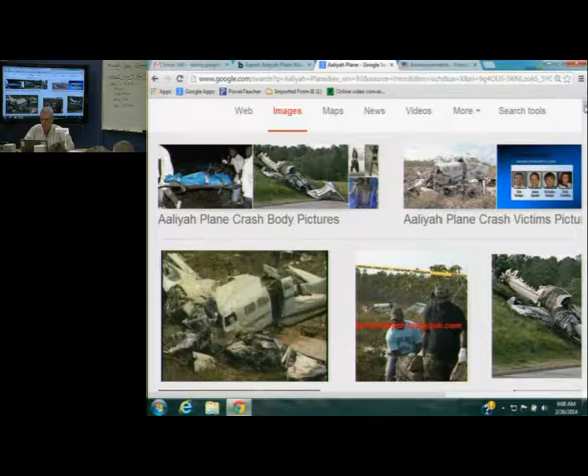Smoke inhalation, yes. So you can look at plane crashes and pretty much determine just by walking up to them the angle of impact of the plane. Write that down, angle of impact. You guys need to know what the angle of impact for the crash is. When you walk up as a safety investigator in the trees like this and you see tails, parts of the fuselage still there, you know that it did not go straight down and that it was probably trying to land or take off in this case.

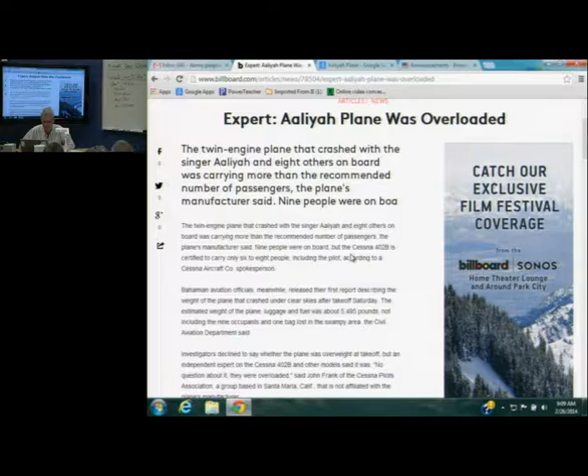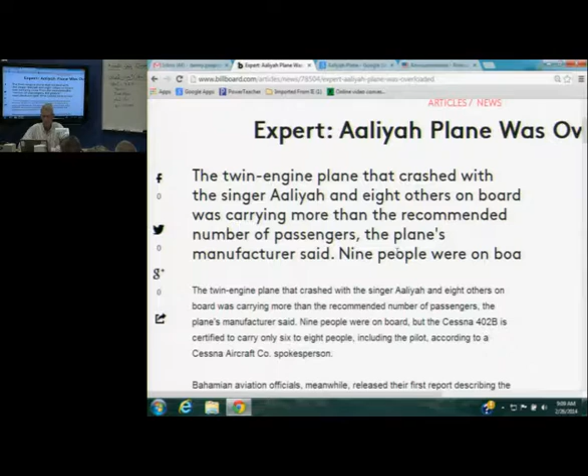So, to cut to the chase, this aircraft was a Cessna 402B, a big Cessna. It was designed to carry, I believe, 6 to 8 people. Can you all read that? Let me blow this up a little bigger. It was taking off from the Bahamas, 6 to 8 people, but 9 people on board. What would that tell you as an aircraft investigator? Overweight. Twin engine.

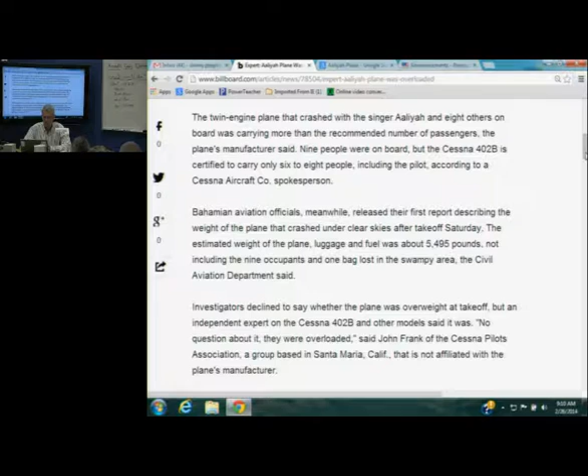This is right after the crash. This would be an FAA crash. How long would it take for the official report to come out? A year. Investigators declined to say whether it was overweight because they couldn't officially say it for a year. But somebody independent, maybe retired from the FAA, could give their opinion. And they were saying, if it included 9 occupants and it was designed for 8, then it might be overloaded.

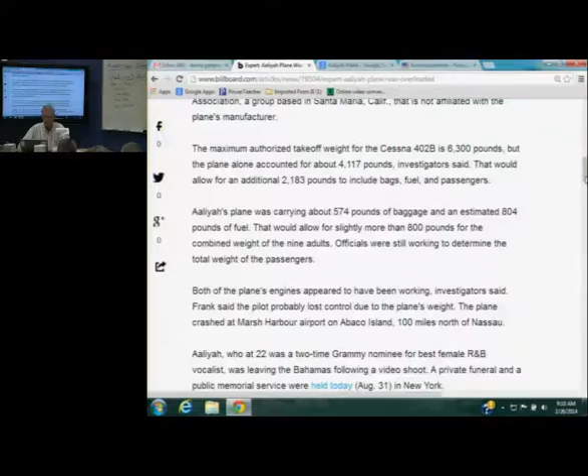When you have an overweight aircraft and you try to take off, what would happen? It might look like that at the end of the runway. It might have been struggling to take off, run off the end of the runway, and landed in the trees or the clearing like that. The rest of the story is that the pilot knew it was overweight, and he argued, no, I'm not going to do it. But do you think that girl would take orders from a pilot she's paying? No. So she pressured him to take off with an extra person as well as sound and photography equipment, because it was a photo shoot in the Bahamas.

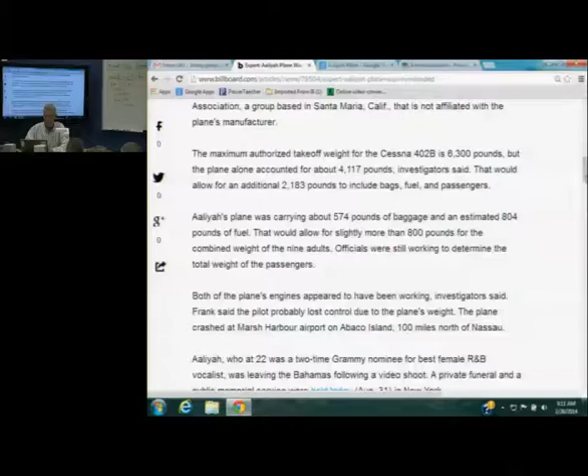And so he took off over gross weight, and basically never flew. The engine doesn't produce enough lift; it doesn't get fast enough. They're flying outside of the envelope of the aircraft, and she crashed. So, what we're going to look at today is something called weight and balance. This is a section of our Jeppesen manual that I teach for ground school in our honors aviation.

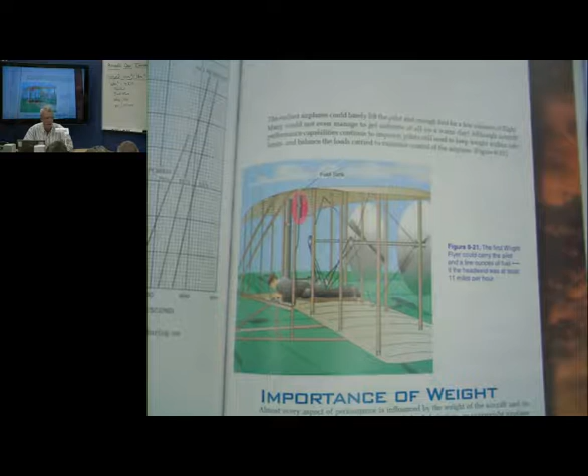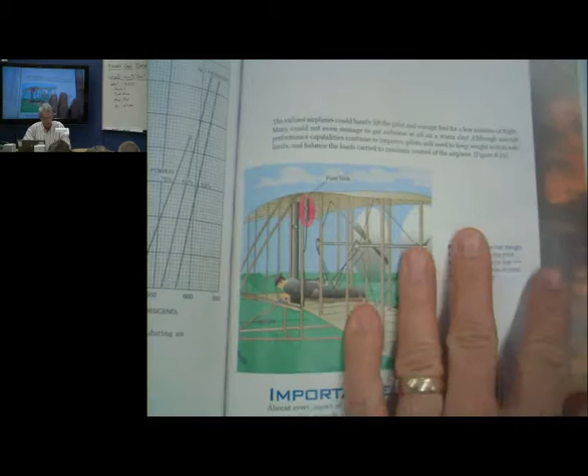And as you can see, I don't need to tell you about the importance of weight because you just saw the importance of weight. You can't fly over gross weight or you're going to have some problems. The other associated problem with weight is balance, and whether or not the plane is properly balanced to make sure that it is inside its envelope.

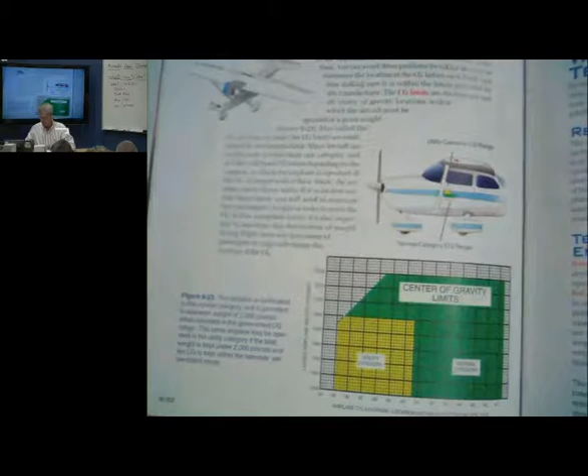You understand the importance of weight, but then on this picture here, let's see how I'm going to do this. There you go. Everybody's got a pencil or pen. Hold up your pencil or pen and try to balance it on your finger. Okay? Can you do that? I did it. You see, this would be a perfect one for Cadet Hoffman to play with here. Okay, all right, so now move it around. So you have it balanced perfectly, and then just try to move your finger.

Believe it or not, that's how a plane is. It needs to be balanced like that going through the air. What happens if you move it a half an inch one way? So, let's say you're balanced perfectly right and you're getting ready to take off, you'll be able to take off. But what if your center of gravity, your center of balance, moves rear? If you move it to the rear, it's going to fall like this, right? The nose is going to fall down. And therefore, you're not going to be able to pull it off the runway.

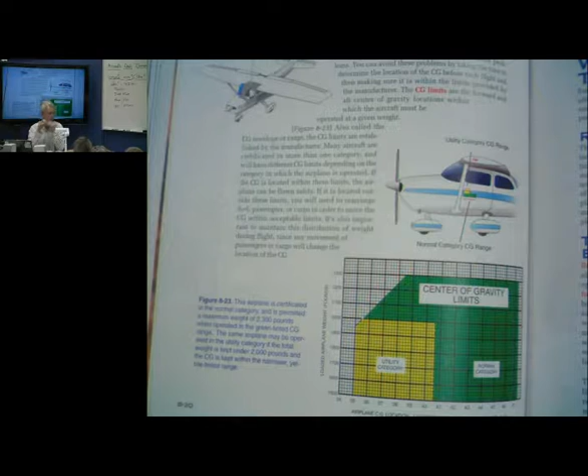Likewise, and that's exactly what happened here, they had incorrect center of gravity, and I don't care how fast you go down the runway, you pull back on the stick, it's not going to take off because it's going to want to fall nose down. Same way, if you have perfect center of gravity and you move the center of gravity forward, then all of a sudden, when you pull to rotate and take off, it's going to keep climbing. And that's happened also. So those are very important.

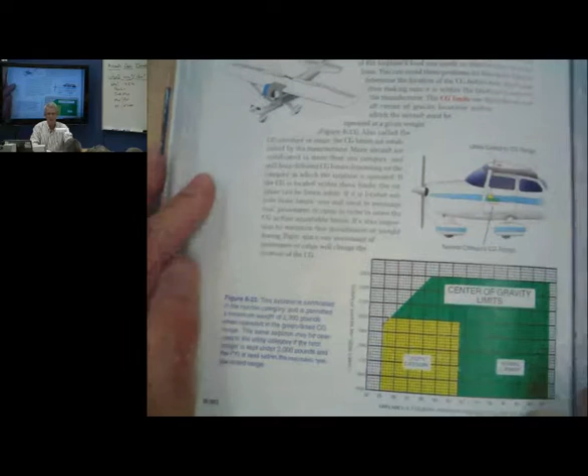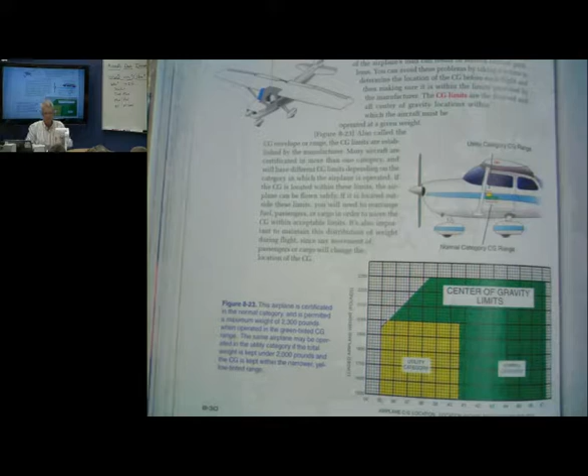And here on the picture, what I just did with your pencil is a very simple thing of the center of gravity, where I got my finger or where I got my pencil here. Your center of gravity is a very specific point on the plane. Okay? CG is center of gravity. And actually they have a range. I don't know how you could simulate that. Maybe you got a flat finger and you can move the finger left and right a little bit. Here's your range. But there is actually a range of the center of gravity where the airplane can balance and be able to fly. That's displayed here on this picture.

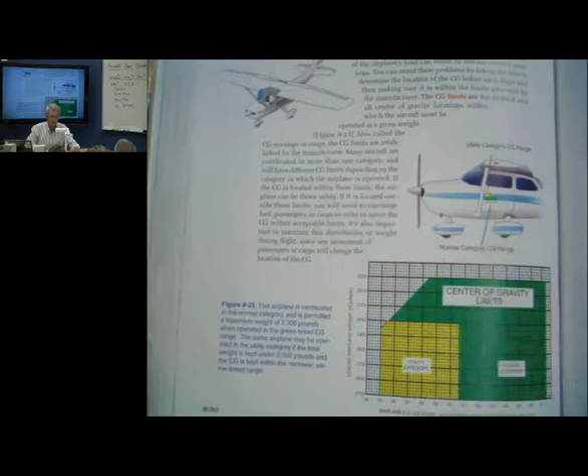And actually, I'll blow this up a little bit here. How about that? Did that blow up? Oh, as far as it goes? Okay, I can't see it.

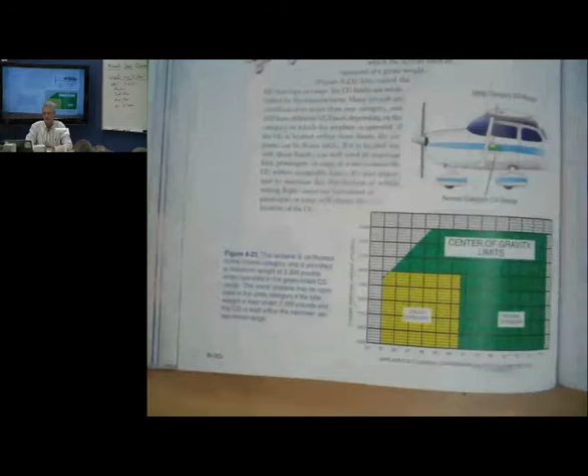See it from there. Center of gravity, you see the green is the actual window, but you can also display it on the envelope. And when I said that the plane for that crash exceeded the center of gravity envelope, this is the envelope on a chart. If you have your center of gravity outside of the envelope, you will not be able to fly properly and crash like these people did. The normal category is described in green here. That's where everybody flies normally.

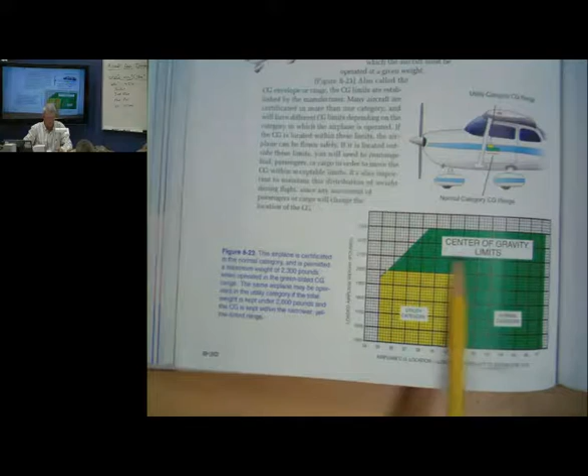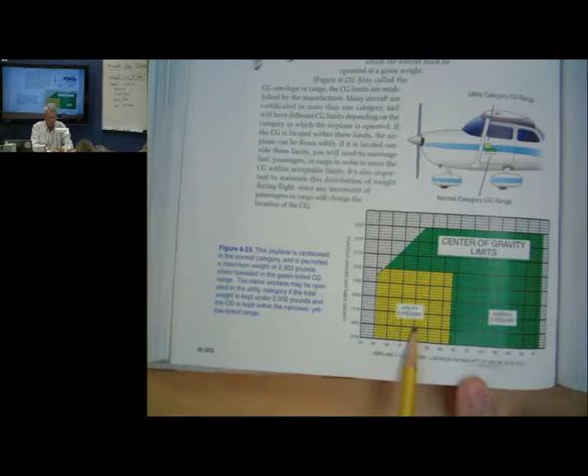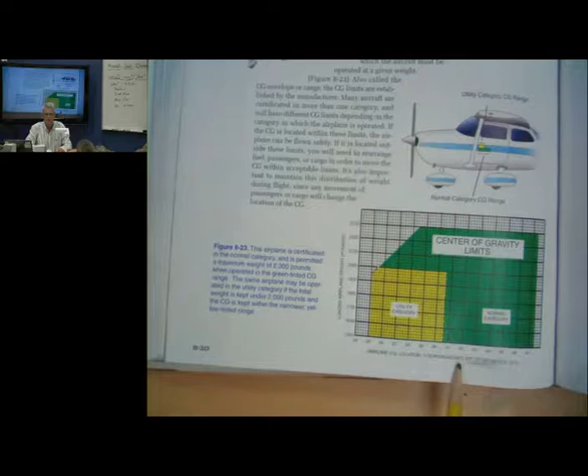And the utility category is sort of just like on the airspeed indicator. Remember we had the yellow portion that you don't want to fly in except in smooth air. This is the utility category, which you wouldn't fly in except in very specific conditions. The way these charts are done, it says location of inches aft of the datum. And for instance, the datum for Cessnas is at the dashboard. So you're sitting in your car and you're looking at the radio. That's the dashboard, and that would be 0. Okay?

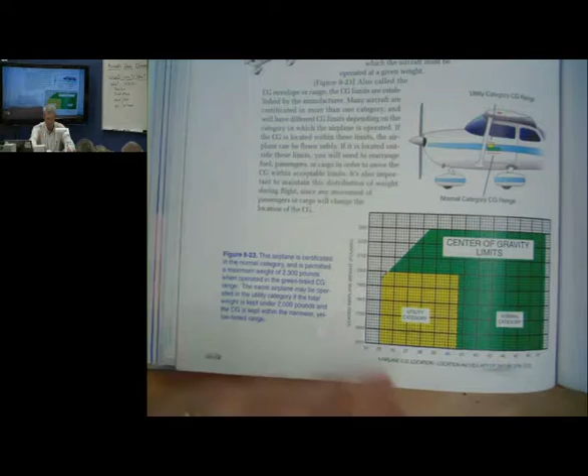And so where you're sitting in your seat, how many inches past 0 is it when you're sitting in a car? How many inches is your body, your center of gravity, when you're sitting in a car from the speedometer, from the radio? How many inches is that, do you think? 24. You think about it, 2 feet? Okay, 24. Well, that is the same exact situation that we do here in determining the center of gravity.

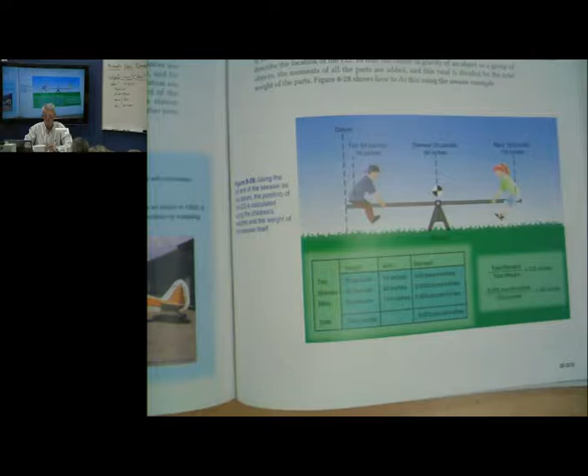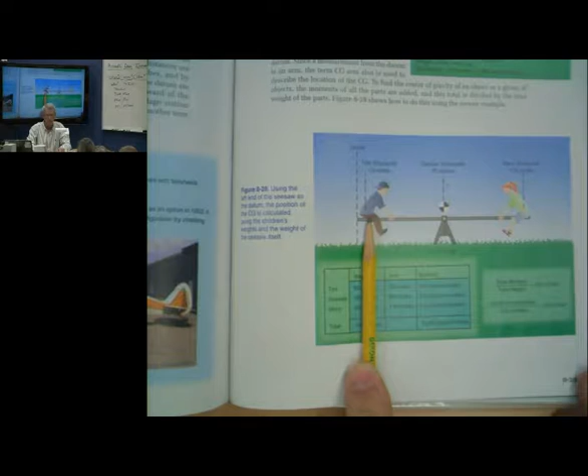It's not unlike sitting on a seesaw, which hopefully everybody's done somewhere in the world. You have your datum, like where my finger is, which would be the dashboard of the car or the plane, and your bottom is sitting here, Tim is sitting 10 inches here. You're measuring what's called the moment, which is the distance and the force. Okay?

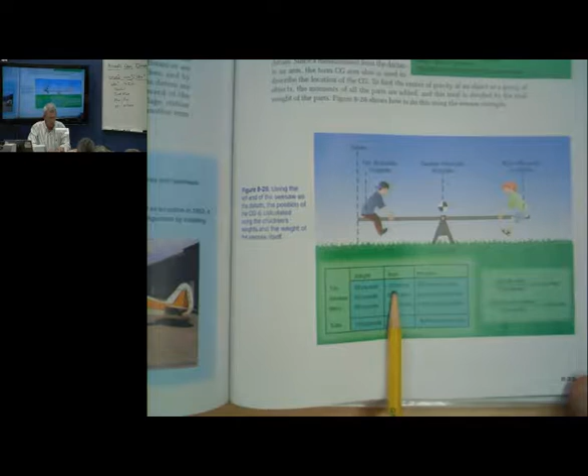So here's Tim, he's 10 inches, and he weighs 50 pounds, and he's right here. So 10 times 50 is what? 500. So therefore you would measure the arm, which is how far it is, and his weight. And so that's 500 inch-pounds.

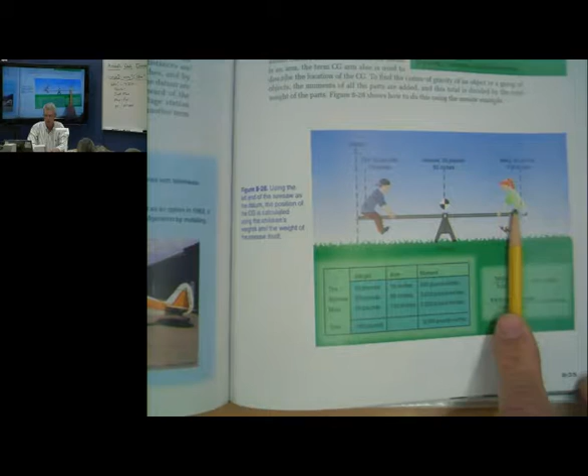You also have Mary, who's 50 pounds, but you know what? She's 110 inches out here. Is she going to cause more stress on that plane because she's sitting way out here? A lot more stress, right? Because this is 0. So she is actually 50 times 110, which would be 5,500.

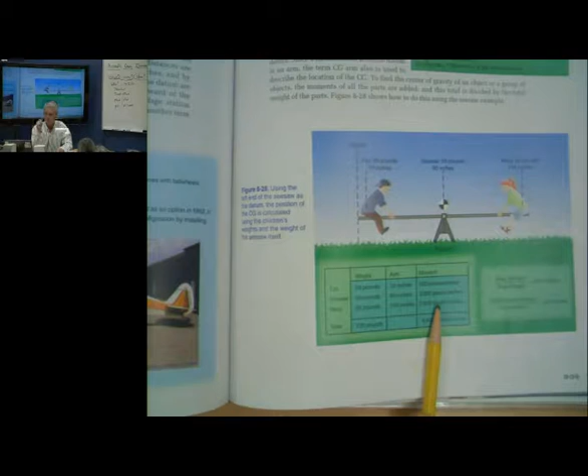And the whole idea behind this weight and balance, again, the pilot is trained to do this. Do you do this when you go fly with Delta? No. Is it done for you? Well, actually, yes. The computers and the pilots figure this out on every commercial plane flight, definitely. And your weight is estimated. Believe it or not, when they check in, the person's typing in the computer an estimation of your weight.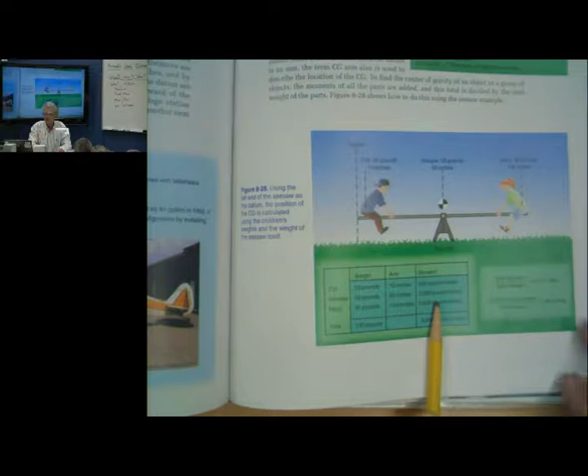Why do you think they weigh the luggage? They weigh the luggage when they check in. Sitting there, bink, okay, you can only have 50 pounds. They know that exactly because they're placing the luggage in the different areas of the plane so that the center of gravity is like that.

Questions? Yes, sir? If you're really heavy, would they change your seat? You better believe it. It happened to me when I was flying to Columbia, South Carolina. They were in a smaller plane, and were full, and they actually said, we need two people to move to the back of the plane. And I was ready to move, man. I want to get that center of gravity in the green envelope, right? And so evidently there were a couple of empty seats in the back, and they needed to move it back.

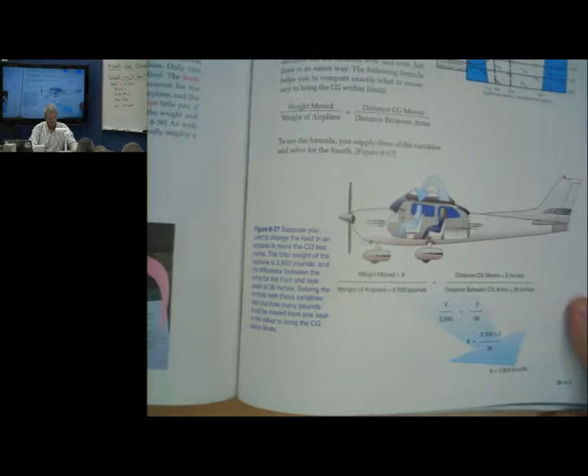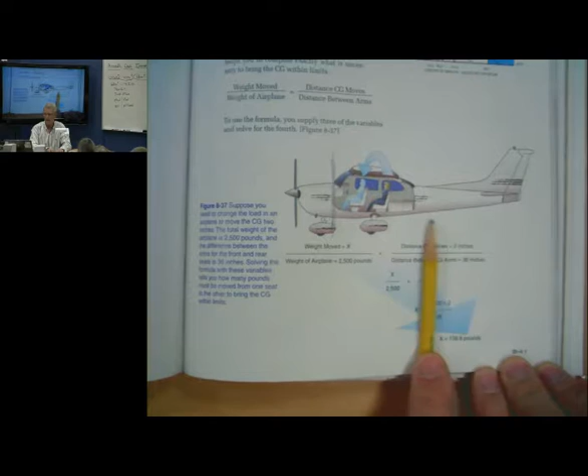So you can see actually from this picture of the plane that if the datum is right here, you will actually measure where the people are sitting and how heavy they are, how heavy the luggage is, how big they are, and you would measure out the inch-pounds, and that would be where you enter in the graph.

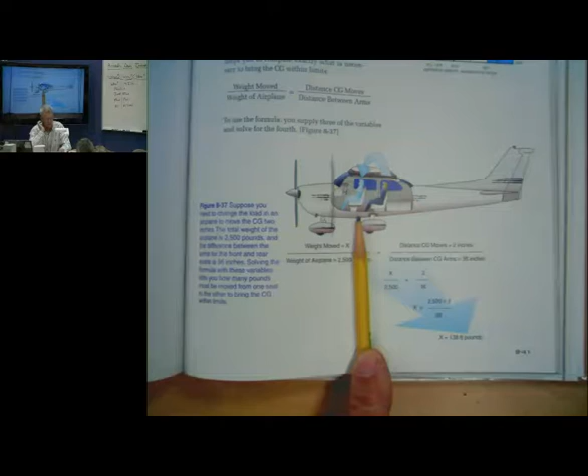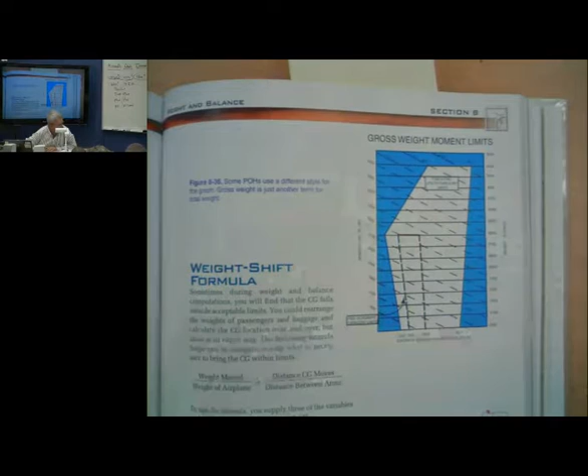Yes, sir. Where would you want the center of lift to be in relation to the center of gravity? The center of flight? Center of gravity is what we're talking about right now. Okay? And the center of gravity needs to be within the window, and here's another picture. This is the window, and down here you have the inches aft. Okay? What's the center of flight? The center of lift. Okay, center of lift versus center of flight. Ask me in a couple minutes. We'll get there, okay? That's good.

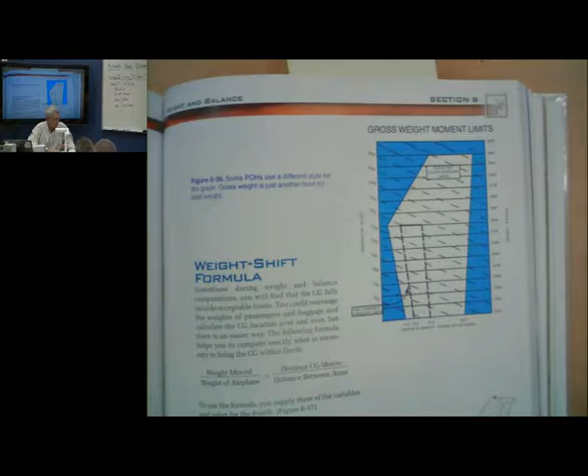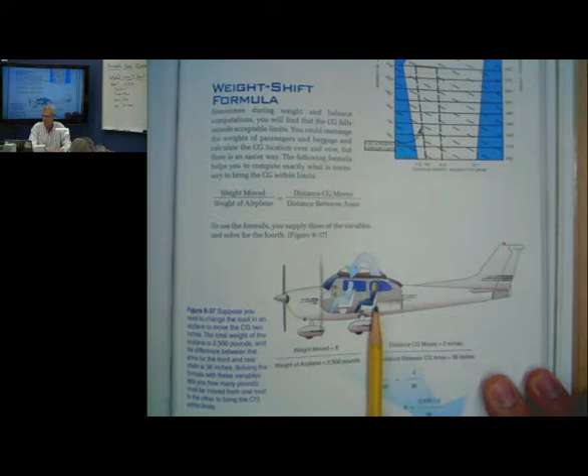So here, you're trying to make sure that it is not out of balance. So if you're sitting here flying in this plane, and you have somebody who's weighing 300 pounds as a pilot, what about if you had some kids in the back? Is that a big deal? Yes. 40 or 50 pounds. Well, it is because they're more inches away from the datum, and they weigh 50 or 100 pounds.

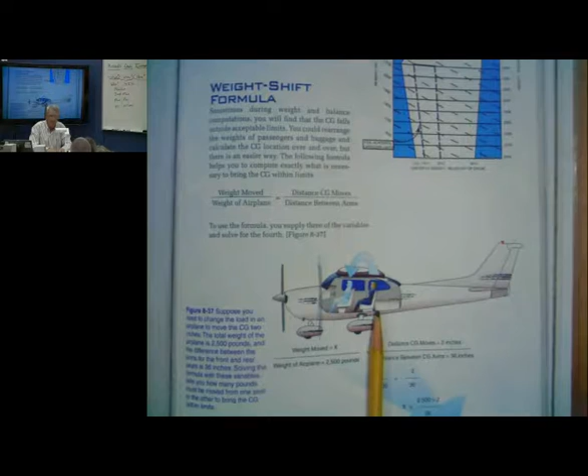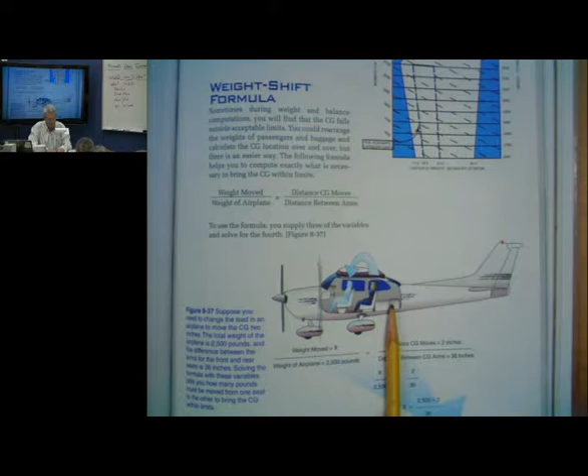But flip-flop it. What if you had a 100-pound pilot and you had 300-pound weight in the back? Or what if you put some luggage behind the second passenger, in the very far back? That would be a huge problem. And so you need to worry about this and think about the weight and balance.

So when you went online and said the plane was overloaded, that's true. But the point is, it's not just overloaded, it was also the balance of the plane and where they put the luggage. So if they were dealing with photograph equipment, lighting, luggage for a movie star that has lots of clothes, they're just probably shoving it in the plane. They're not worrying about the details, how much does that luggage weigh, and you might want to put that here, and you might want to put her here.

And there's other articles that talk about an argument between the pilot and the movie star and her agent, because movie stars don't talk to regular people. And the argument was so bad that the pilot was saying he was not going to take off. And they forced him to. It was peer pressure. It was what we call press-on-itis in the aviation world, and he was forced to take off, knowing that he was overweight and probably out of balance. So it was a bad, bad situation.

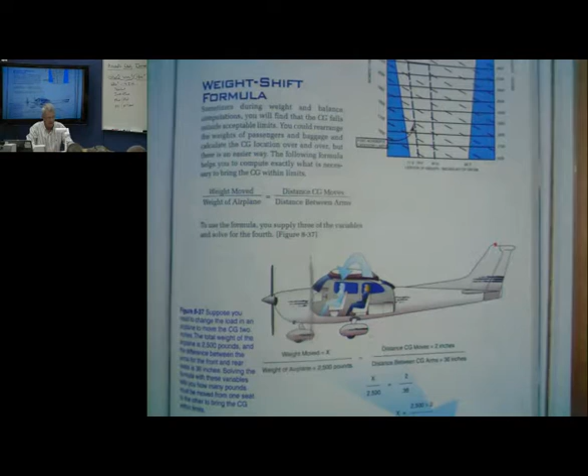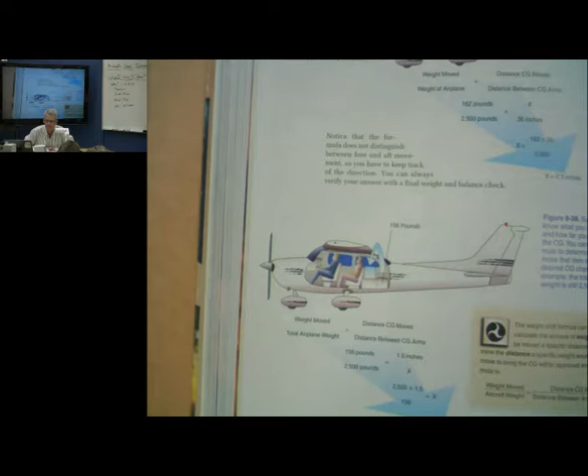So, in this center of gravity and center of lift, as you brought up, you want to make sure, yes ma'am? I have a question, like with the carry-on luggage, sometimes people with the bigger bags, they make them put the bags towards the back with the carry-on. And why do you think they're doing that? Would it be to even out the weight? Center of gravity and the weight and balance.

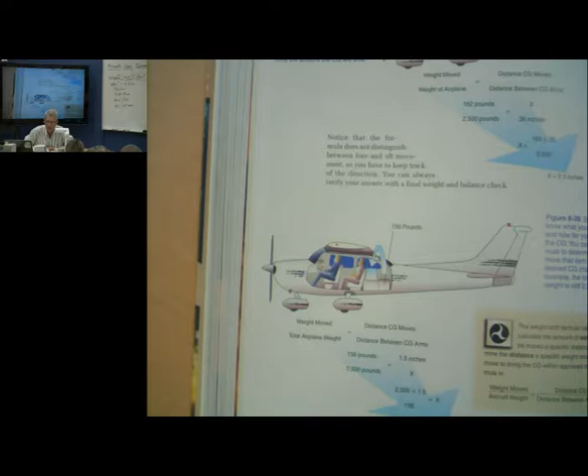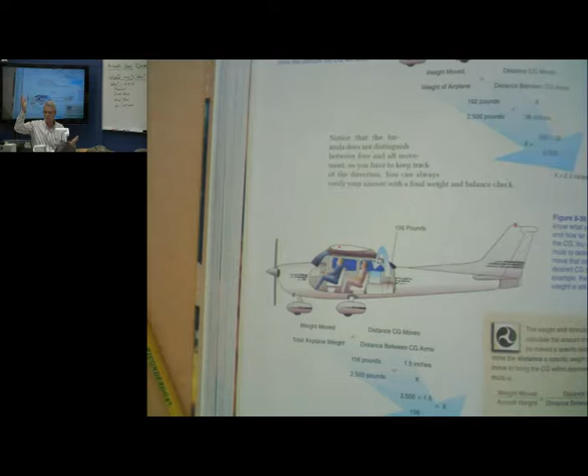You're exactly right. That's why they say, hey, we have to check the luggage and you cannot bring it and stick it overhead. When they check it, they put it underneath where you're sitting, and they put it a very specific amount of inches away from the datum so that they know that they got 700 pounds right here versus 200 or 300 pounds. They don't weigh your carry-on, right? So they probably look at you and say, okay, you weigh 200 pounds. And they know that you're sitting here, you're probably going to have the carry-on here, and that's 200 pounds. And they do that calculation, okay?

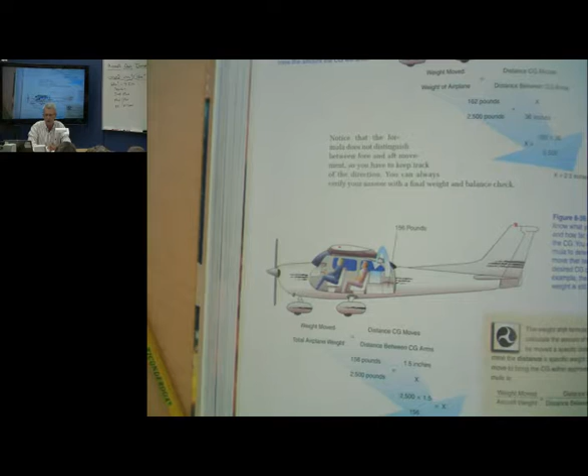But if it gets tight, and you know what, during the winter, think about it. Do people weigh more in the winter? Yes. Yeah, because they're wearing more clothes and luggage and stuff like that. And so during the winter, they may limit your carry-on and put it underneath in the storage area in a very specific area. Okay, so that is one of the major reasons of airplane crashes, and I wanted to go through that. There was also another, let me see here.

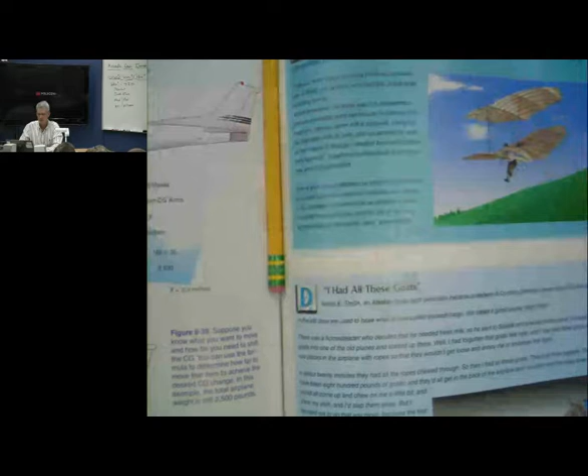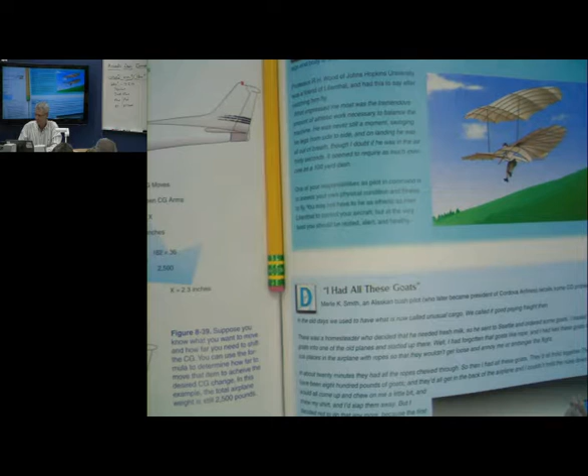This is another very famous crash here. Okay, if you wake up and you're the flight investigator and you show up in Alaska and you come walking up to a plane like this at the end of the runway, it kills 10 people. That's a bad day, okay? And you look at it, it's all bent like this. The first thing you might think is maybe it's an engine failure, maybe they didn't make it off the runway. But in this case, basically an air taxi crashed on takeoff at this Alaskan airport, killing all people. In these types of situations, the blunt force trauma does not kill the people. It's the fire and the smoke inhalation.

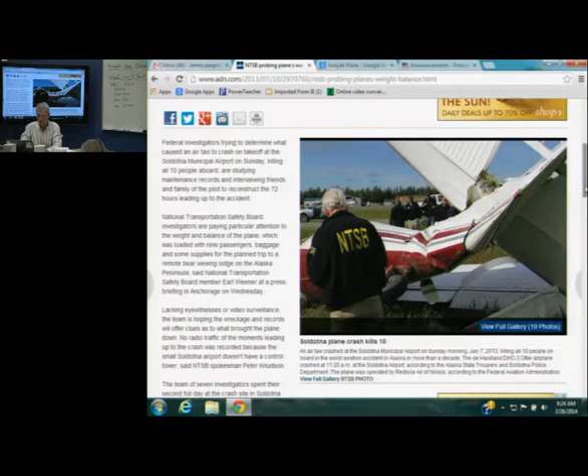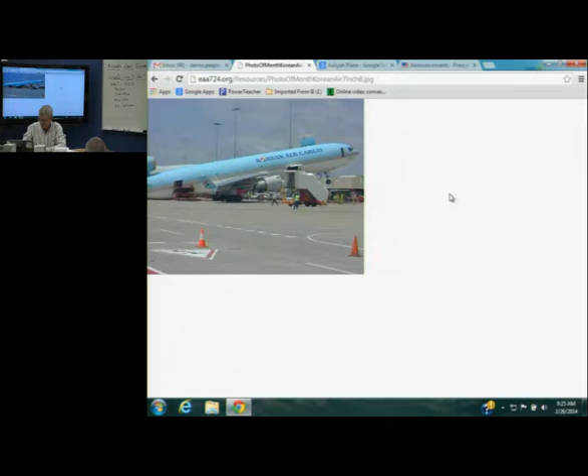Okay? But you can see a plane just like that and think, you know what, maybe they had too many people, maybe the pilot was in a rush, maybe they didn't consider it. Here's another pretty famous weight imbalance. Do you think this guy had a bad day? These are maintenance people. Oops, where'd he go? There we go. Maintenance people. And they were doing testing on this aircraft. Can you see what happened to that aircraft? Too much weight on the tail.

What is a huge amount of weight other than the cargo for the planes? Fuel. So guess what probably happened here? Too much in the back. Completely empty plane. Maybe they put on too much fuel with no one in there. Or they were loading the luggage in the rear of the aircraft and nobody's in the front. That's kind of a bad day, isn't it? How do you fix that? Put more weight in the front, sir. Put more weight in the front or defuel it? What takes a long time is pulling fuel out of a plane. But anyway, this can happen. That's another example of a weight imbalance.

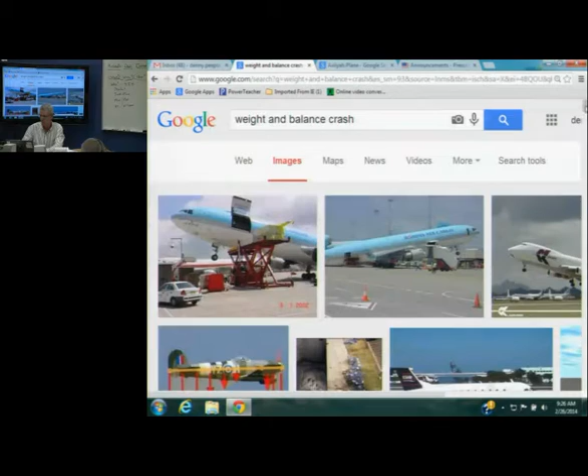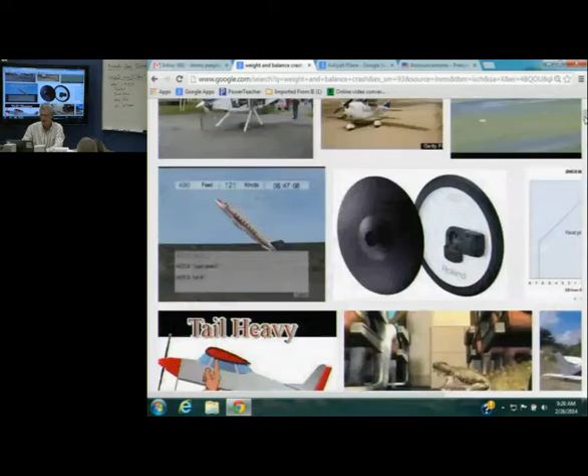All right, any other questions regarding weight and balance? Big picture. That's the plane crash right there. This was actually a famous US Air one. If you're getting ready to take off, and everything is perfect, and as soon as you rotate the aircraft, the load masters did not tie down your luggage or your generator or whatever you're carrying, and it shifts. You know it's going to be at this station, at these inches, but as soon as you rotate, it shifts 5 feet. Therefore, your center of gravity moves aft, and your nose is going to go up, uncontrollably up.

And this is exactly what happened in, I'm pretty sure, Charlotte. But look, 121 knots at 490 feet, very low to the ground. This is a commuter aircraft, and the person is saying push down, and you're pushing as far as you can, but you can't. The center of gravity is over. Basically it was a shift of luggage once she rotated the aircraft. So it was a bad scene. So that can happen after you actually take off, okay?

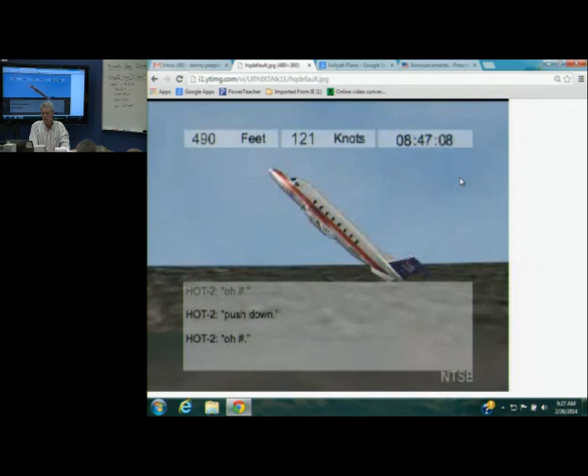All right. That will conclude lesson 2 for today. We will be back here tomorrow.